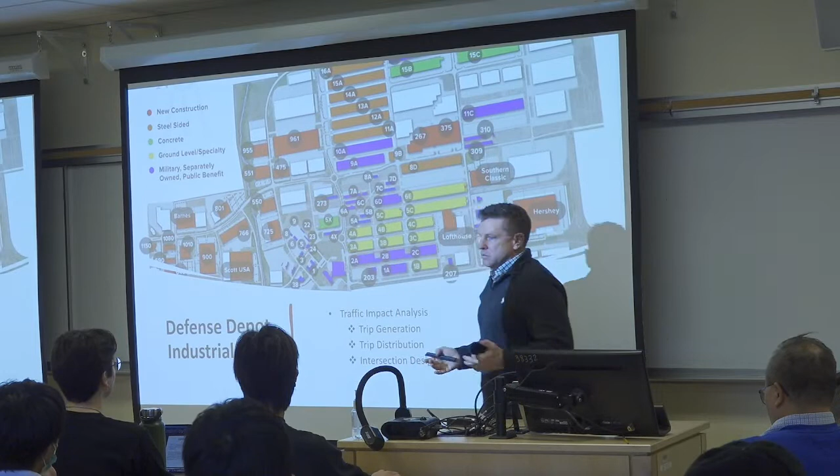I had just recently graduated from college. My professor was from England - Peter Martin - and he showed us pictures about roundabouts. He taught us about roundabouts, taught us about multi-lane roundabouts.

I thought, man, this is cool. So I just laid it out - I laid out the inscribed diameter. It was bigger than what was needed based on the volume of traffic, but in terms of safety and reducing conflict, this was a solution that worked. The city loved it, and once we designed the first one, they had me do three more for the other intersections.

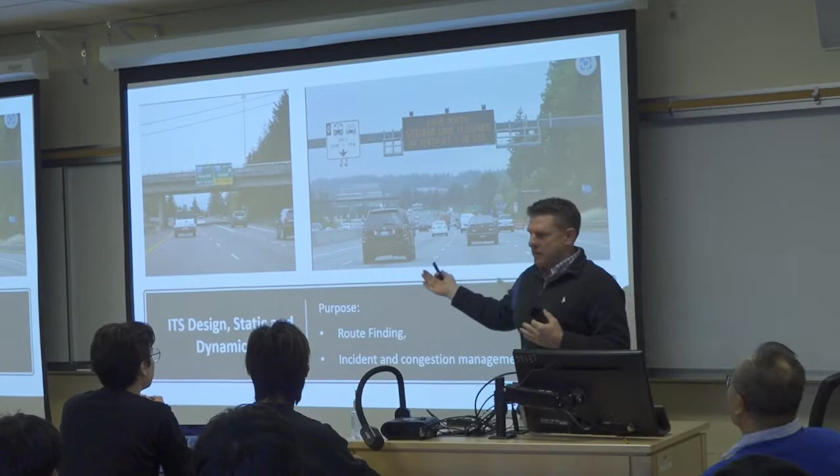The other thing I mentioned to you guys a little bit ago is with ITS, we were doing the VMS signs and then also signing. Did you ever think about, have you ever been told that a static sign was the first ITS device? Anybody ever heard that? I learned that from Peter Martin.

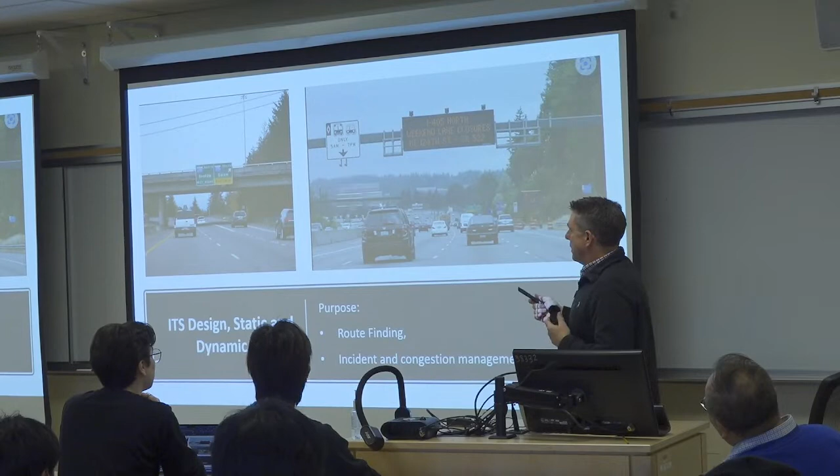So the first ITS design that was ever introduced, as they say in engineering, is as simple as a stop sign. It's information to the public that is using the system. And so that was part of my responsibility, was looking at our guide signs, looking at our roadway information, and how people are using it. You have to be mindful and aware of what is the message you're trying to communicate and how well it will be perceived.

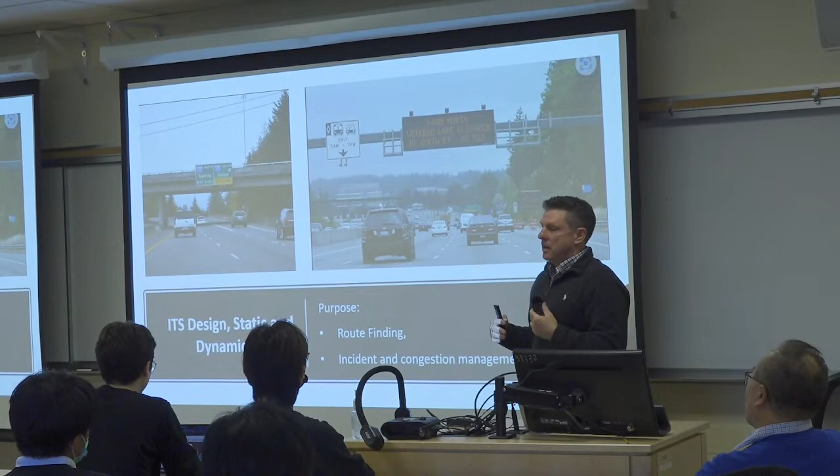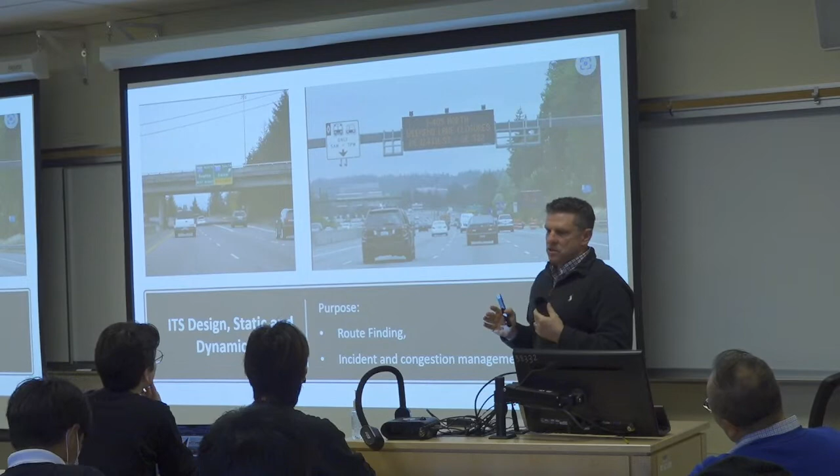There's all kinds of guidelines. If you haven't heard of it by now, many of you will come in contact with it, which is the MUTCD, the Manual on Uniform Traffic Control Devices. It's a handbook that every traffic engineer uses, and it provides design standards for those signs. Sometimes there are situations where the MUTCD doesn't work for every situation, and then you have to get creative and work it out.

The VMS sign, the VMS signs, they're a unique animal. Any idea on how much you think a VMS sign would cost to put in?

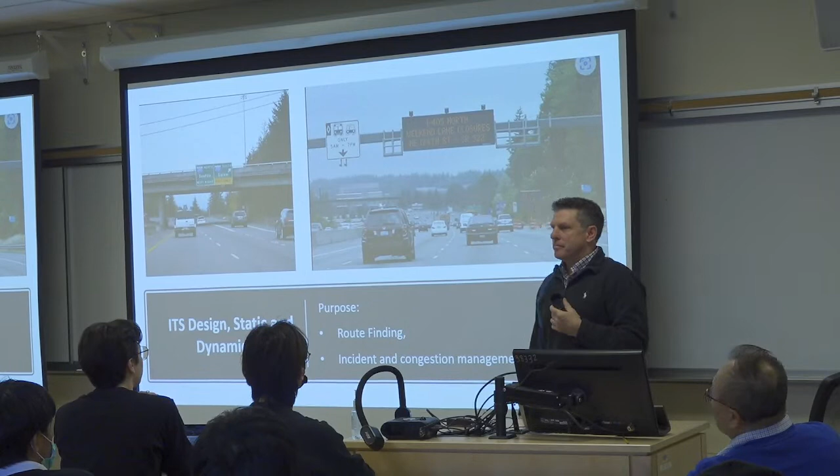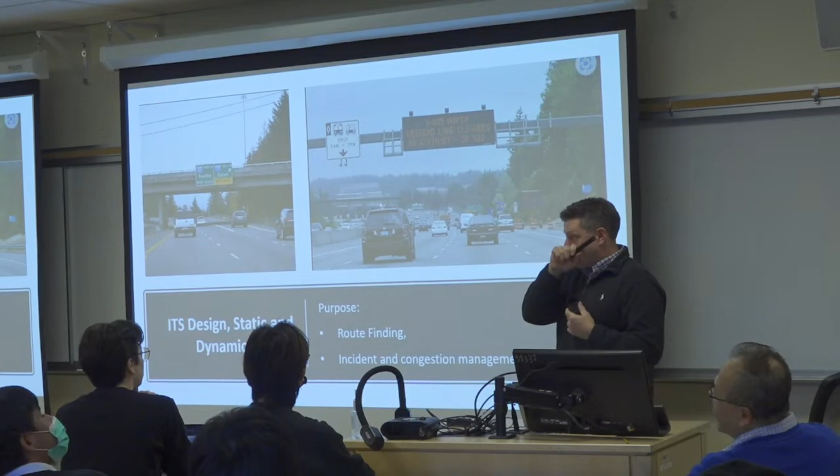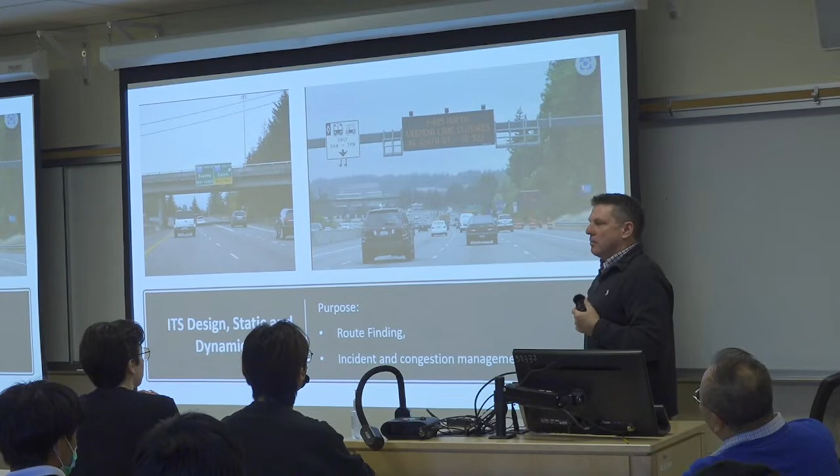And then when you get to the overhead gantry, you can spend anywhere from 500 on up. It just depends on how wide the road is that you're trying to cross, and then where your cabinet is for the controls. This is where, if you like to be creative, your world as an engineer gets to be fun, in my opinion.

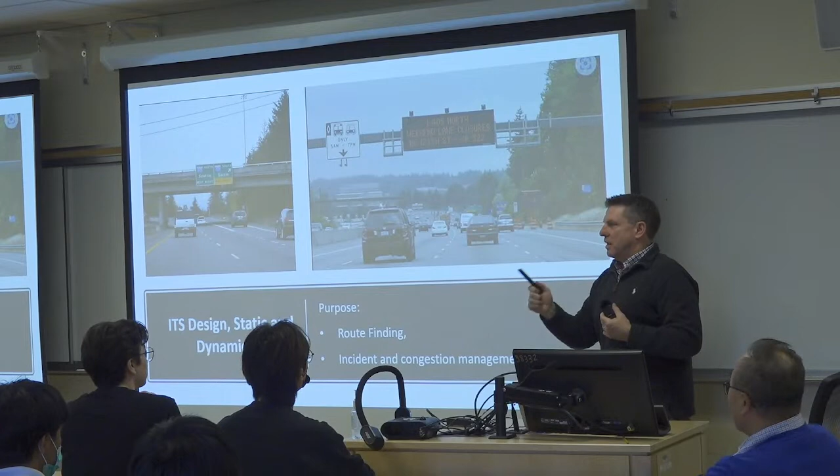Because when you're given the task of being able to come up with a way to communicate to the public, and you know you've got to come up with a solution to do it, and you get to pick the spot, and you get to design it, and you get to figure out how everything comes together. Where should you put the cabinet? What kind of a VMS board do you want?

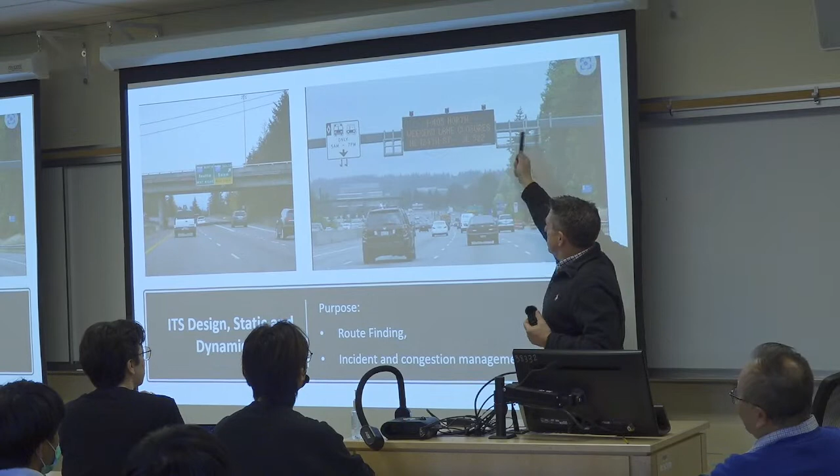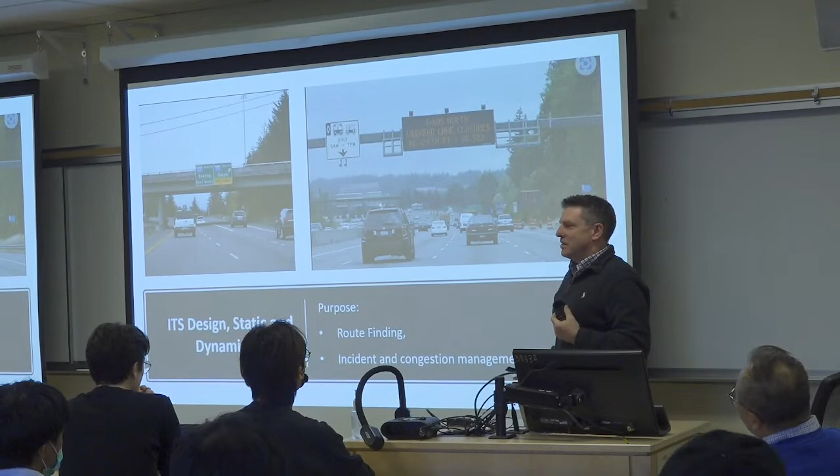These new VMS signs that they have now are different than when I first started. You can walk right inside of one of these things, and you can fix everything from within the cabinet. Those are all things you're thinking about - how to get maintenance in there. You're talking with the maintenance people as you're designing these things. So these are just kind of the facts as you're thinking about it.

How are you going to do this? How do you make all this stuff come together?

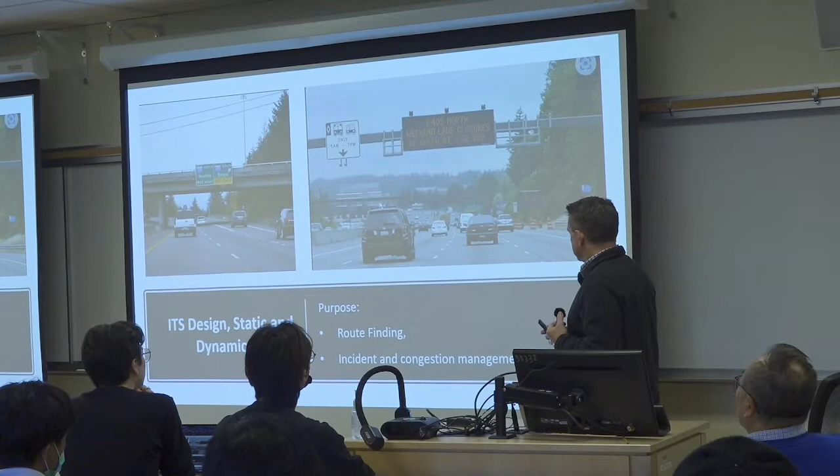The Tacoma Narrows. So I had the opportunity to work on this one first.

And what we had to do is - how do you guys think you get from the ground level up to the top? A big ladder? So as an engineer, would you guys all be willing to go up and do this? Go up to the top? Yeah? So my first experience is they have an elevator.

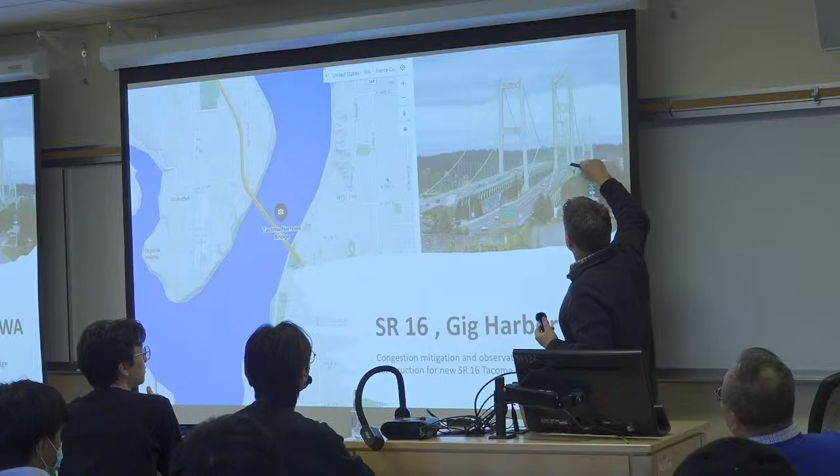And the elevator is in that side of the structure, shaped like an oversized water heater. It's round, and there was no light in it when I went, so the maintenance guy just handed me a flashlight. So I'm just holding the flashlight, standing in this round container, and you just feel every joint as you're going up, and you're just praying that it doesn't get stuck.

But anyways, we went to the top and we set up a camera at the very top of the tower so we could monitor the construction of the new bridge. It was a full PTZ camera at the time, the latest and greatest - 20 years ago, whenever that was, 2000 something.

And then we put another one over on this side, I think it was at Doc Weathers Park. That way they could monitor the construction of the bridge, and they could do a time lapse to show how things were coming together.

And then we had to design the communication cable that went all along the underside of that bridge. So we had to figure out how much fiber - and fiber is king in today's world. Back in the day when I first started, it was microwave or T1, or they called it a POTS line, plain old telephone. But now they've moved on to fiber.

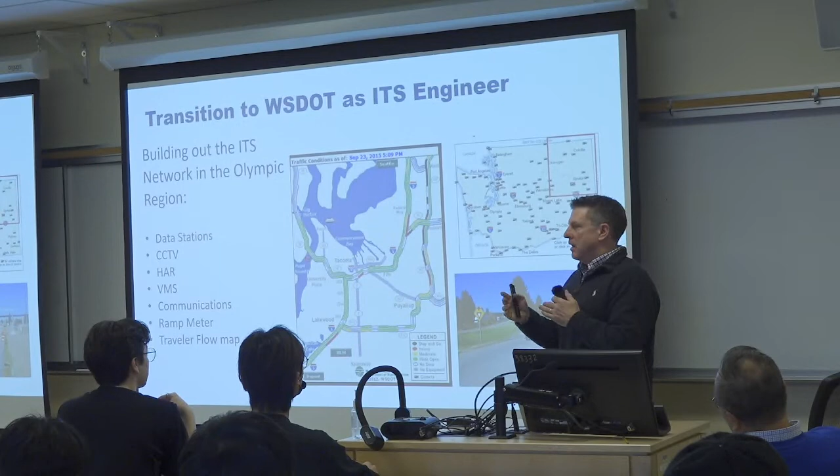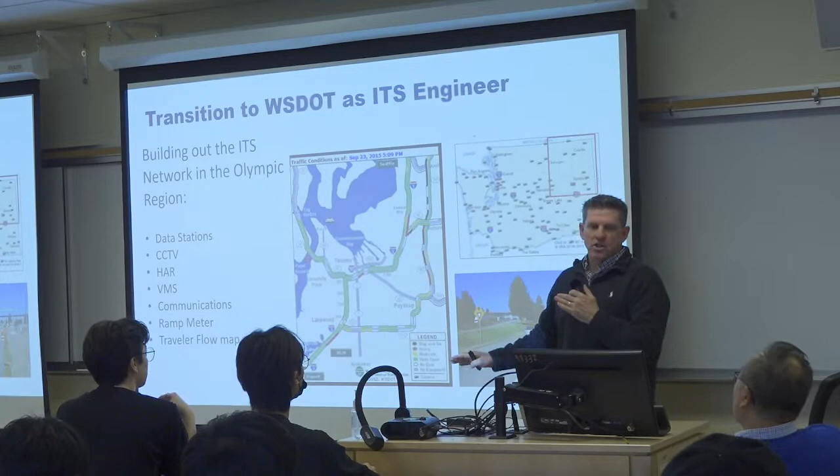During the earthquake of 2001, a lot of our communication infrastructure was built on private communication systems, the Verizons, the T-Mobiles, the AT&Ts. So what happened is during the earthquake, they prioritized emergency services over everyone else, and we lost control and communication of our system. So that's when we said, let's go back and revisit communications and figure out how to make ours more resilient.

We also looked at ramp meters, trying to put ramp meters on all of our on-ramps to help manage flow.

And then automated enforcement. I feel like I'm doing a lot of talking, you guys. Are there any questions? Anything? Is this really boring to you?

I may have a question. I'm curious about the data station you mentioned before. You said it can collect so many kinds of data, including vehicle classification, speed, density, occupancy. So I wonder how it can do that. What kind of sensors do you use for that?

So make sure when you talk about occupancy, we're not thinking about people occupancy. We're thinking about vehicle occupancy in the lane.

There's a number of different ways to measure this. The most reliable way is loops, right? You cut a metallic or electrical wire into the pavement, spaced a certain distance apart. You know that distance, so it calculates the time a vehicle takes to pass from one loop to the next. It can tell you how many vehicles pass that loop over a certain time, and how long it takes for a vehicle to pass over the loop. From those three things, you get your speed, your volume, your classification, and you can calculate the passenger cars per hour per lane.

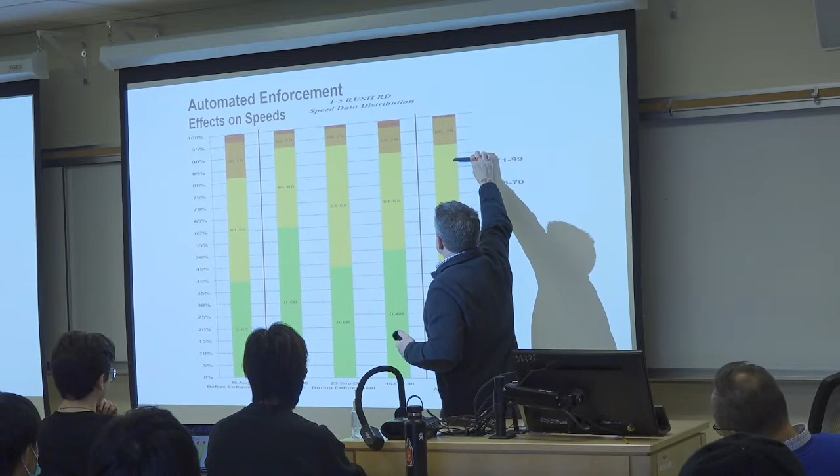So you see when it started, back in '08 - really shows I'm getting older, doesn't it? And then after enforcement, you can see where we reduced the frequency of how people were using that corridor. People became familiar with it, after they got caught they knew there was photo enforcement, but they didn't know where because we moved the van anywhere within the 8 miles. So they just knew they had to slow down through that 8-mile section. But it had an effect - it reduced the overall number of people driving between 71 to 99 miles an hour.

State Patrol maintains a log of the top 100 - it's not a good list. It's a list of drivers caught exceeding 100 miles an hour or more, and that list is regularly updated. We use that to help us understand as we're calculating things like the 85th percentile. There's areas of the state where the speed is greater than the posted speed, so we had to look at what we can do to bring those speeds down. Anyway, we used to - I don't do that anymore.

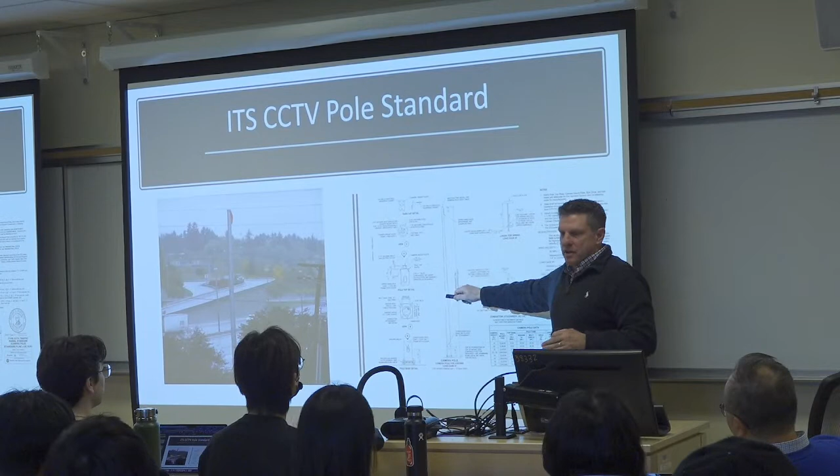So if we needed to put a camera on it, a radar detector, a speed limit sign, we tried to throw everything at it that we could think of, and then we designed it. The cost difference added maybe $1,000 or $2,000 onto the cost of the pole, and then this became the state standard. So now all the regions, this is what they use today.

And then you just throw in the other little devices, if you have an elbow that you mount onto a bridge, just working through some of those details.

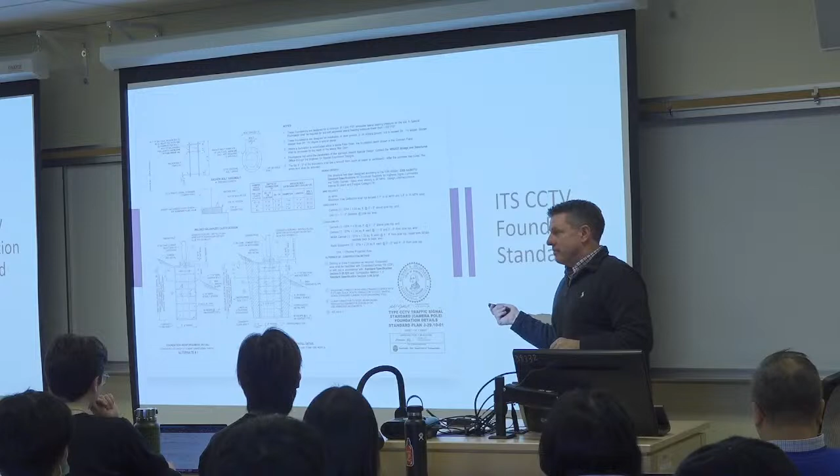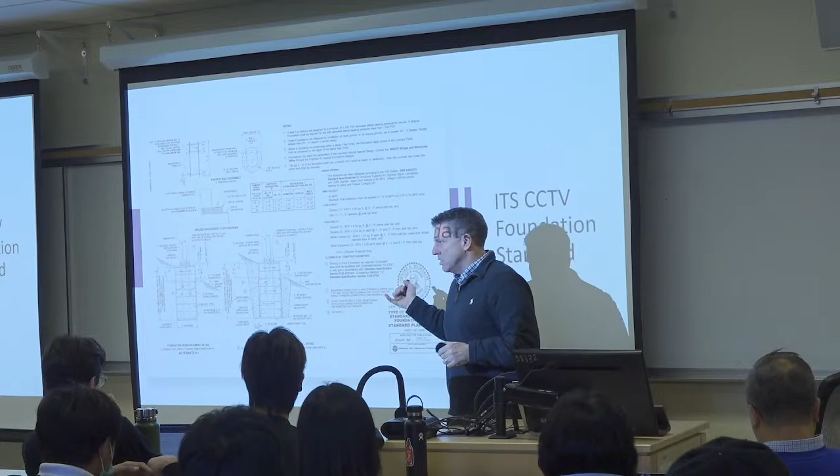And then the partner to that is the foundation. I noticed looking at all the foundation plans that the difference in the depth of the foundation was typically about 1 foot, but the cost to do the soil analysis, the geotech investigation, was about $6,000 a site. So a yard or two of concrete is what, $100? So what we did is assume a minimum bearing pressure for the soil, and we said this is our new standard for our foundation.

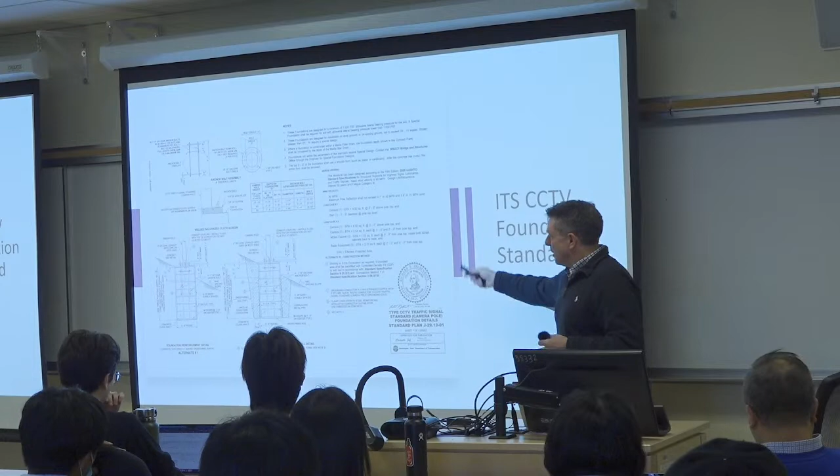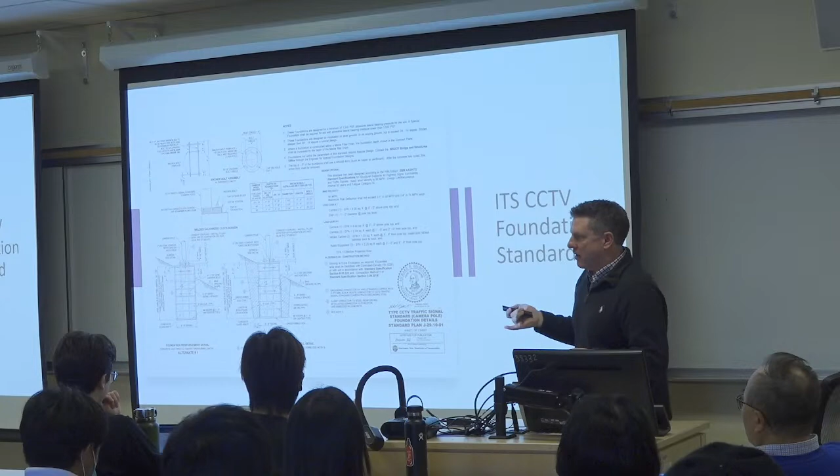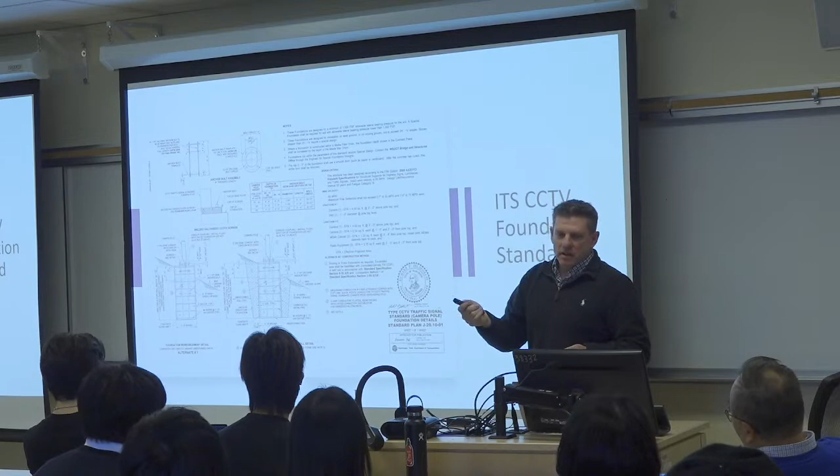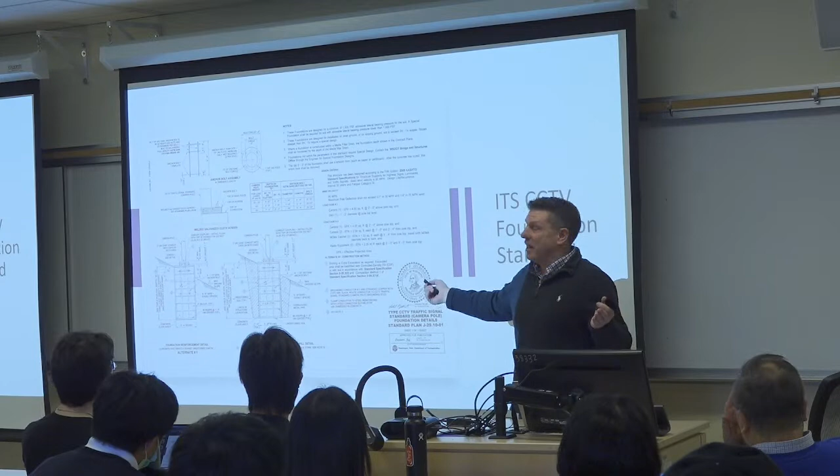And there's always people out there to help you do this. If you take your idea and share it with the right people... I didn't do this design. I took this to our structural engineer, and I just shared with him what I was thinking.

He liked the idea, and so we came up with this plan. I think it's with those resources and relationships, that's how you do it. That's the most important piece I can pass along to you: engineering is about relationships, whether you realize it or not. The success of your project will often depend on your relationships.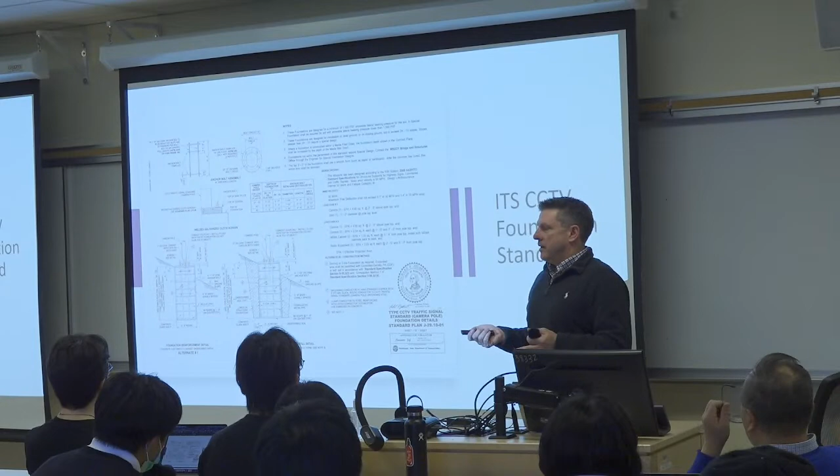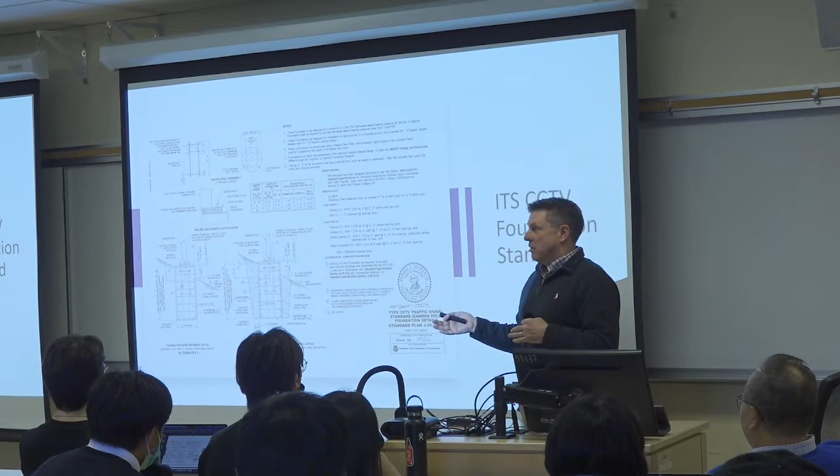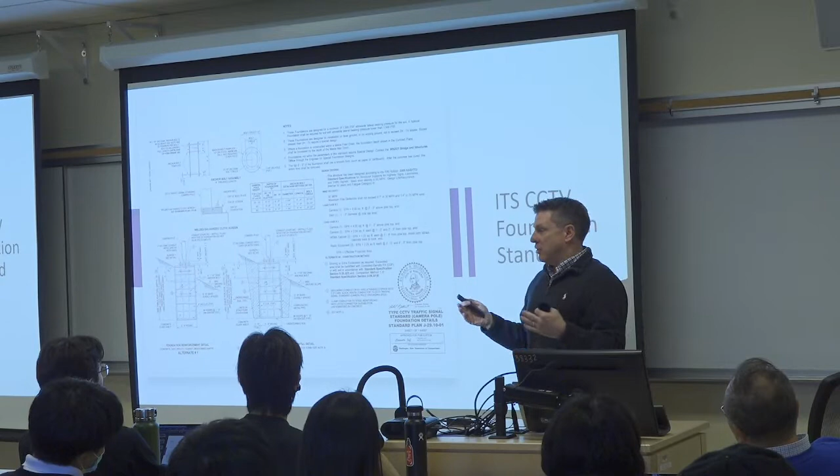When I first started consulting, my boss asked me if I knew what PE stood for. Of course I did, right? Professional engineer. And he said no, it's about politics. It's political engineering. I didn't understand that at the time, but I do today. It's important for you to maintain and develop relationships with your peers and with people that have different expertise than you. You don't have everything you need to solve every problem, but you can find people that do, and those people can help you develop a solid project.

Are we out of time? Yeah, if you want to take a 5 to 10 minute break, you could. It's all under your control. Do you guys need me to take a break? Are you done with me? Or you can continue. Okay, we need more time, we can maybe continue. Feel free to use the restroom. Do you guys need a break? Take a break.

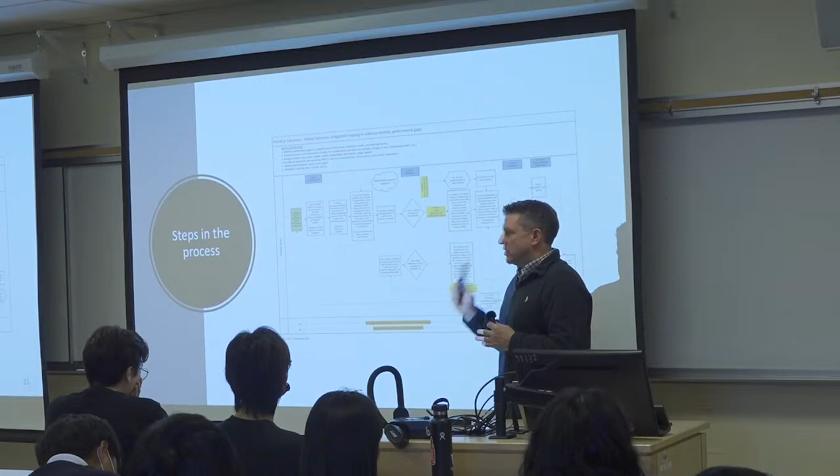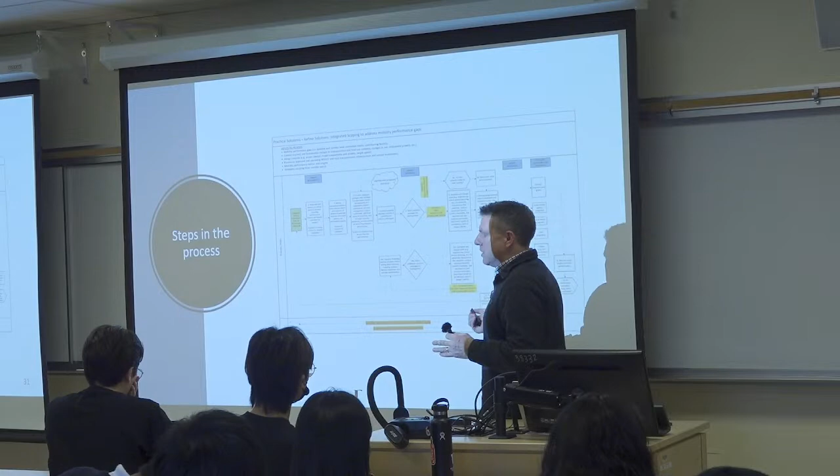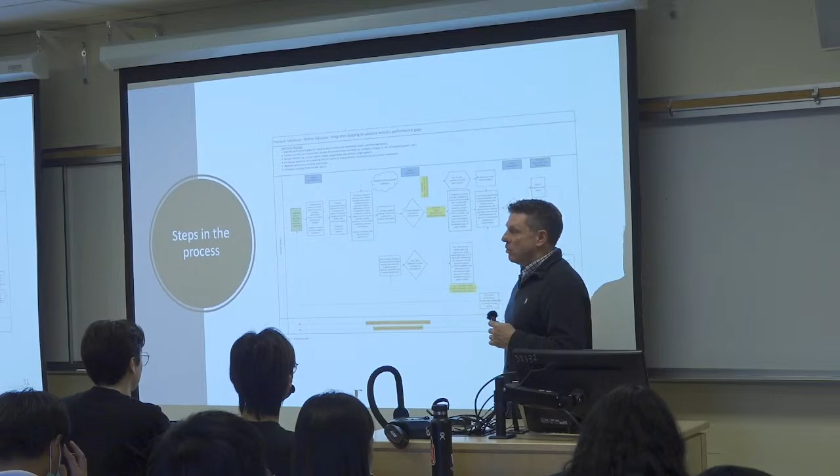Engineers love their processes. What we were doing here, we were trying to figure out a way, because there are so many needs - if you're working for a state or city government, you're always trying to figure out how to pay for the needs that you have. And how do you identify those needs? So we worked with a team and came up with a process called the integrated scoping process. The overall reason for this was to identify what are the needs, how do we fund them, and how do we deliver them, and who is responsible for delivering them. So you get to use your skills as an engineer to develop these types of processes to help people understand how decisions are made. And I think that's where the thinking comes in - with the skills you're learning in school, it helps you develop stuff like this.

What incremental improvements, what are some improvements we could do in 0 to 4 years. This was done by pulling together focus groups. There were 10 focus groups where we pulled in people from law enforcement, planning, engineering, local agencies, and we wanted to hear every idea they had for reducing congestion on I-5. My scope of work was from Trosper Way, down by L&I on I-5, up to the King County line, and our job was to figure out what we can do to reduce congestion.

Overall there were a couple hundred ideas that came out of this group. Sometimes engineers have a reputation for thinking we're always right. Usually we are, but the public doesn't like that. The public likes to be brought along, they like to know that what they're bringing to the table is being heard. I think it's important for us to acknowledge that and make sure we're not forcing a solution on them, that we're bringing them along and making them part of the solution. That's how we got to these strategies.

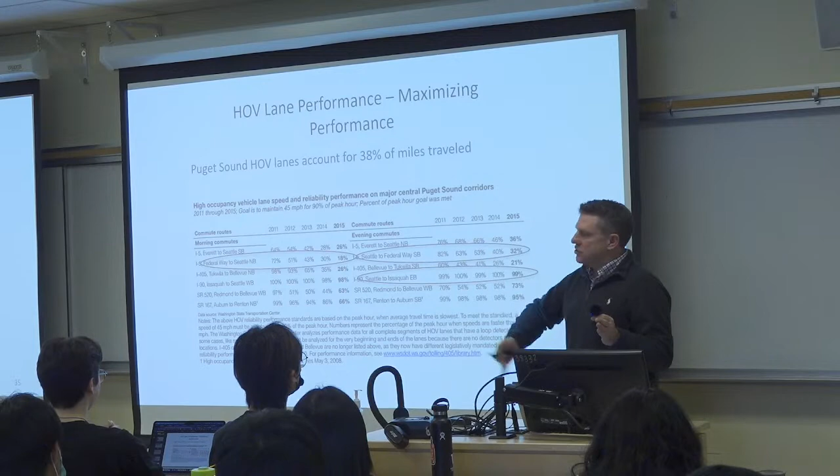Every year for the last 5 or so years, the commercial carrier group was hiring a lobbyist to try to get that law changed, and we would always have to provide testimony and justification on why we don't think it's a safe strategy.

HOV lanes, reliability and benefits, monitoring the results from HOV lanes. We want to make sure that if people are jumping in the HOV lane and paying money for it, it's actually helping them get where they want to go faster than if they're sitting in regular traffic. So monitoring, I would work with UW students, and we would look at the data and provide this annual report. We'd work with the Seattle division, and then we would put this together so we could share what it looked like.

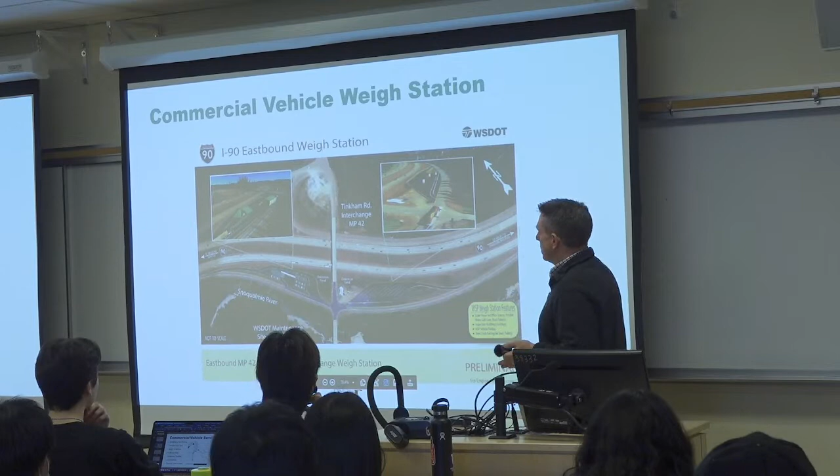I'm trying to jump through this, you guys. This is just an example of a location where we were looking at putting a weigh station facility, and kind of what the configuration looks like and some of the detail that goes into that.

So, like the weigh stations—is their primary service basically ensuring trucks are operating at load capacity? It has nothing to do with importing goods or anything like that? Is that data used for anything else, or just for the service?

So the way it works is if a truck driver wants to, he or she can get a transponder from us. The transponder becomes an electronic fingerprint of that truck—it records what the cargo is, who the driver is, and reports all the information we need for that load. If a driver comes to our weigh station, we have an overhead detector that picks up that transponder and downloads it into our federal database. If that trucker is good to go, he or she gets a green light and can pass. If not, they automatically have to come in. If they come in, we weigh them and inspect their vehicle, and they're going to charge you too. If they're overweight, we take them out of service, and we either make them divide their load or come up with another option. But we're not going to let them back out on the roadway.

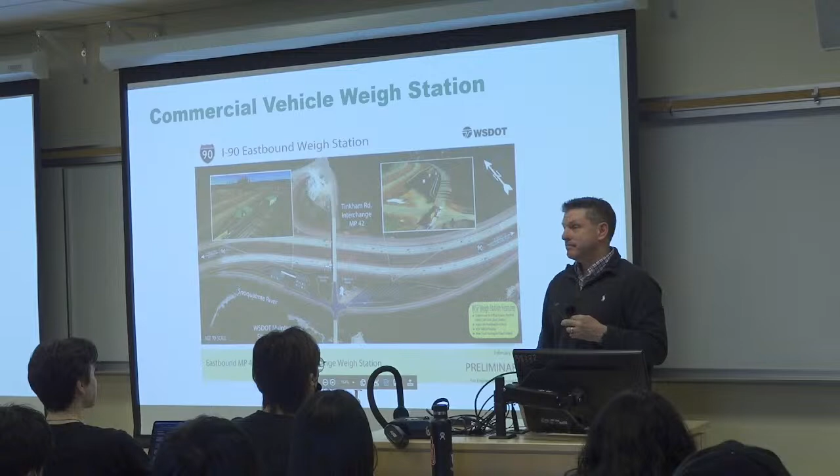So this is an example of a weigh station, right? This is also like a State Patrol detachment facility. So you've got State Patrol who's positioned in here, and often there's a scale pit, maybe on the other side of that wall, and then there may be an inspection pit back behind the building where they can pull their trucks in and do their inspection.

A facility like this, we spend about $16 to $20 million on to build it. Interesting thing, you guys, I think 2 years ago, Ridgefield Weigh Station, a fairly new facility - in front of the building we put concrete barriers, right? And the barriers taper from like 6 inches up to like 3 feet.

This Cadillac came into the work zone doing about 100 plus and hit that barrier, clipped the top of the roof, and then came back down. Craziest thing I'd ever seen. It was actually a suicide attempt.

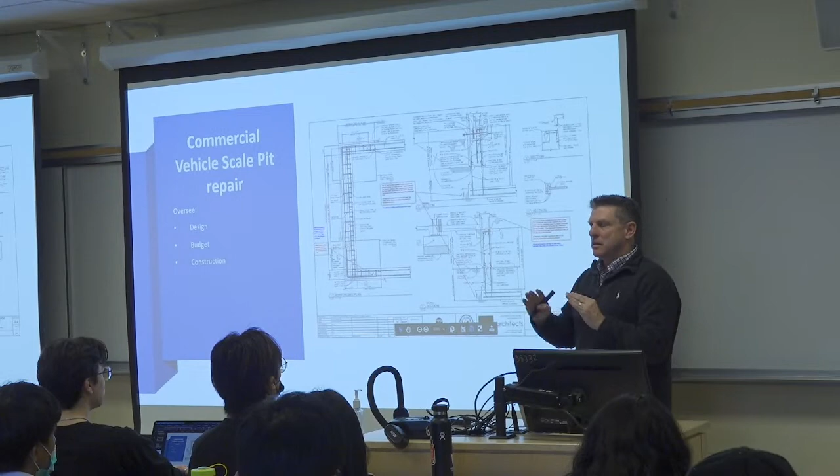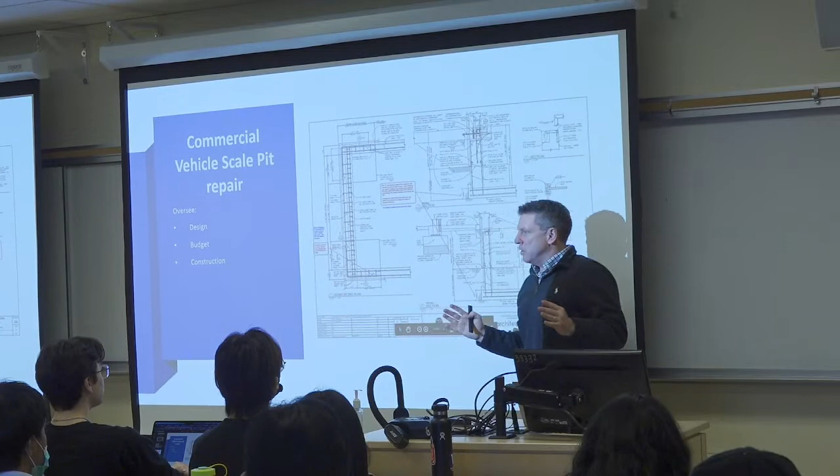Then I just wanted to understand. The local engineers were saying, well, let's just rebuild it. And I'm like, time out, man, let's understand why is it failing. So then we started looking at the rebar, looking at the concrete. And I'm like, how is it that we can build a bridge abutment that can last for 50 years, but we can't build a scale pit to last for 20?

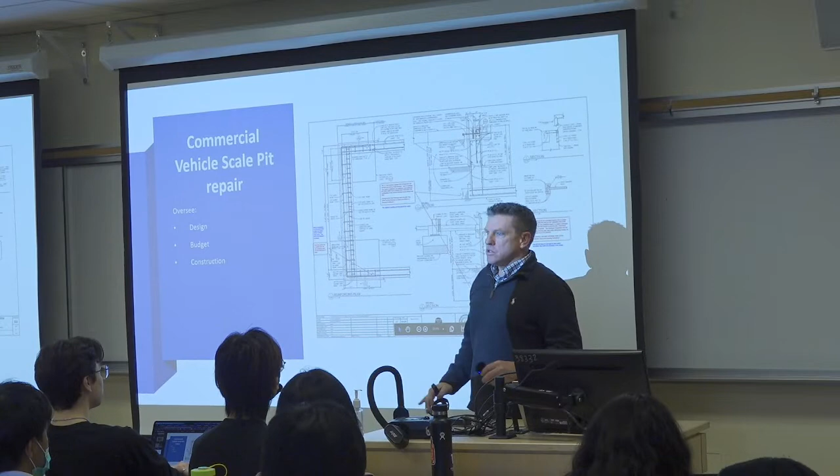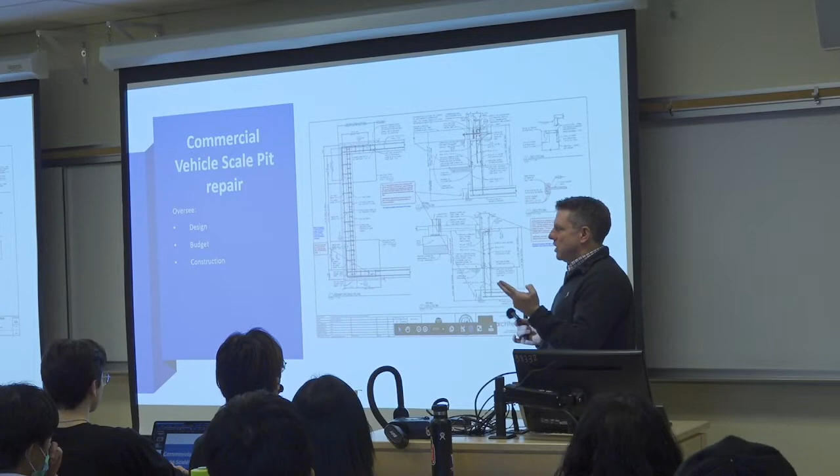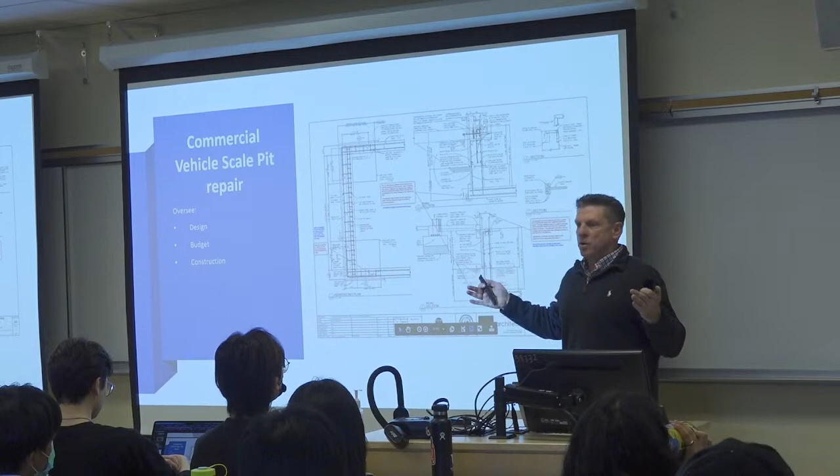So we started looking at this, and we realized there were things we could do similar, so I reached out to the bridge engineers - I'm like, what can we do here? These comments are from our bridge engineers, and they said what we can do is change the concrete design, change the rebar and make it all epoxy coated, and change our steel to make it all stainless steel - any connection will be stainless steel. So we changed it for about 10% more, but we'll get another 15 years additional life out of it - instead of 5, we're going to get 20. To me, that's a pretty good investment.

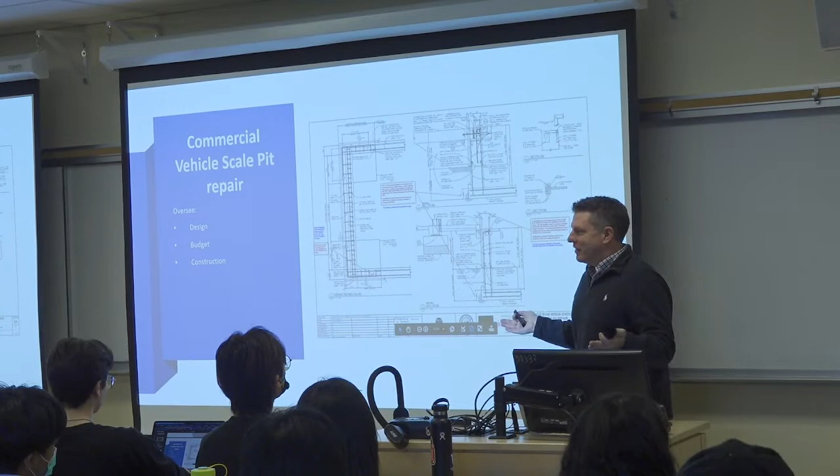So I think the question for you as engineers is, don't be afraid to ask why. How often are trucks supposed to get weighed?

It depends on the transponder. If a driver has a transponder, they should be weighed before they leave with their load, right? Because every state is different, so if you're a carrier crossing state lines, you have to obey the laws of that state. If you have a Washington DOT transponder and you're coming into our state from Oregon, you'll probably have to be weighed coming in across the border. But once you've done that, you're free to pass all the way to Canada, if you're good.

All right, the other part is commercial carriers. With our commercial carriers, if we have an oversized load, we are processing the permits, verifying the route that they are going on, and making sure that whatever it is they're carrying, that they can make the turn, that they can make the height, and that they've got the right pilot car and pilot car certification.

As an example, over the next I think 2 years, Washington State, they're going to be bringing in 100 windmills from the south up to the east side, and all of those had to be permitted. It's going to happen late at night, when traffic is at the lowest, and it's going to happen over time, not all at once.

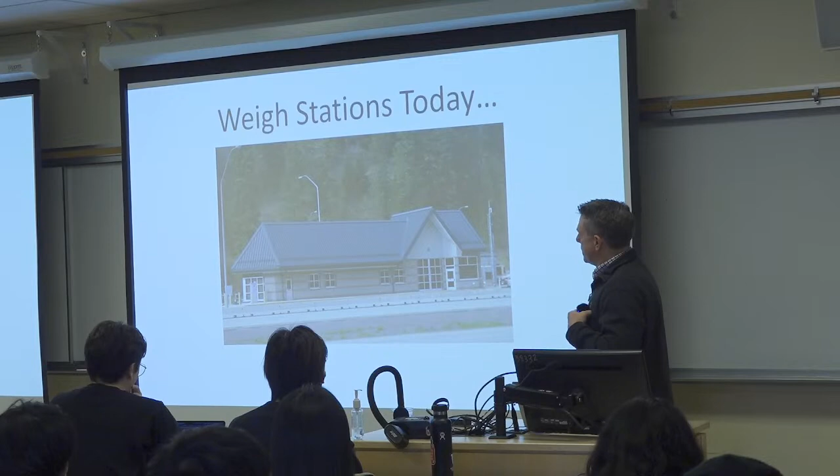So this is an example of a weigh station today. I told you about the cost - this is what we're trying to get to. This is what they call weigh-in-motion, and it has all of the technology that building has. It can measure the weight, check the ID of the driver, screen the transponder, and send it along to your computer if you have the IP address to connect to it. If a driver is operating at an illegal weight, the officer could see it and radio to go after that driver. The difference is this costs about $350,000 to build instead of $16 to 20 million. This is where we'd like to get because we can do more enforcement in more places.

How is it weighing - is there still a scale under the ground? Yeah, so there's bars in the ground, calibrated, and you'll see these long lines - the pavement has to be very smooth. You can't have ruts in it. It's got to be pretty level, and it's typically concrete. So not every site we do that, but that's the direction we're headed.

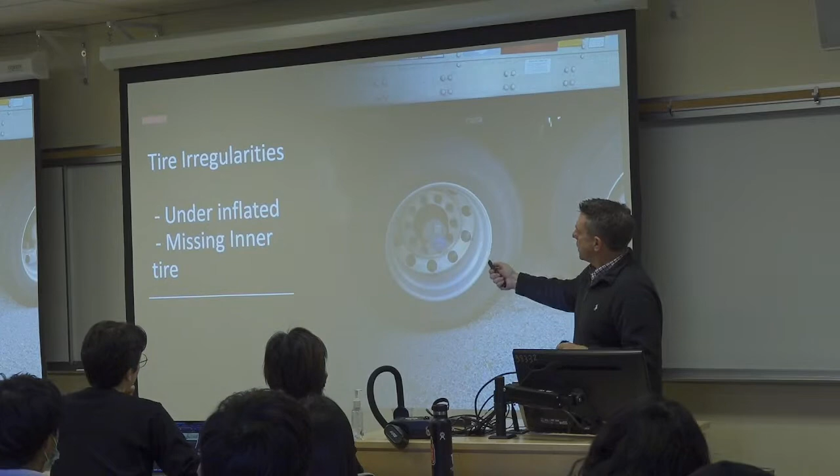The tire anomaly system was something new we were looking at just before I left. This allows us to monitor the individual tires of a truck. It will tell us if a tire is flat or underinflated, and we can bring that truck in for a more visual inspection. It will tell you which tire it is - it highlights it so you can bring the truck in and go right over to do the inspection.

The other thing we're doing for our truck parking pilot - what we tried didn't work as well as we thought it would. This was a wireless detector, about 3.5 inches square and 2 inches high. We core a hole in the pavement, drop it in, fill it full of epoxy, and it's wireless - it detects a magnetic surface.

They make all kinds of claims. Remember the test site I talked about? These guys claimed a battery could last 10 years - I think we got 3, if we're lucky less than that. It's great near term, but even still the accuracy and reliability isn't that great. It's just a 4-inch diameter hole - we drop it in and cover it with epoxy.

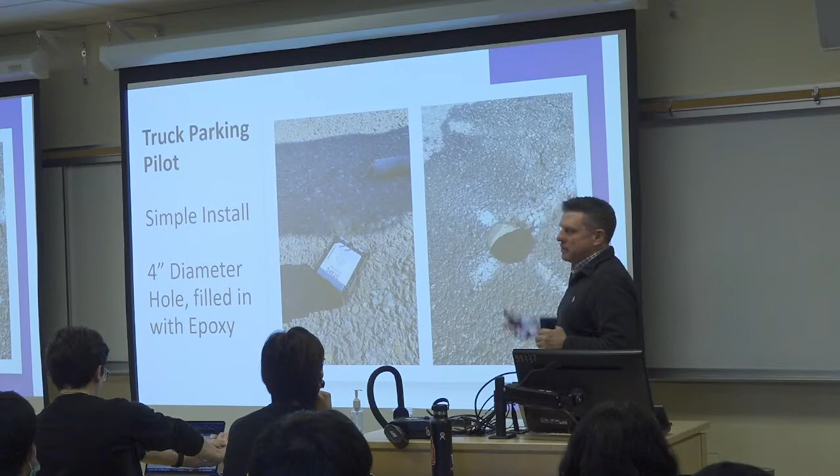This is where I am today - I'm in Park City, and these were some of the problems I was handed when I started there.

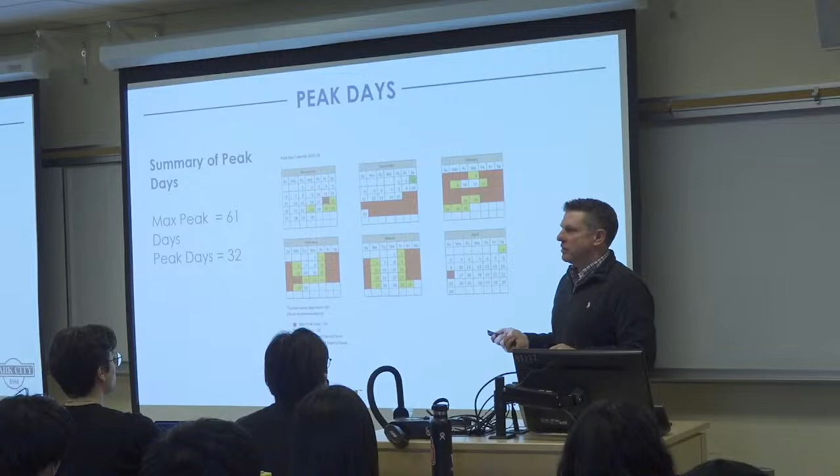Emergency access to resorts, public safety in neighborhoods, impacts on resident quality of life, traffic, transit stuck in traffic. What we did is say, I want to understand the days when all this is happening - what are the worst days of the year? So we pulled the data together. The days in red are the worst days - when the resorts are open and we typically have great snow, with a max peak of 61. The yellow are just peak days - heavy, but not as bad as red. As an example, at peak it could take 45 minutes to an hour to move 2 to 3 miles. You could walk most places faster than you could drive in Park City.

Areas of focus: circulation, transit, parking, guest decision-making, resident impacts. We put together a comprehensive plan and took it to city council - five members plus the mayor - and said, here's how we propose to solve the problem. We identified a circulation plan around the base resort, recommended a park and ride lot, wanted to increase transit frequency from 30 to 20 minutes, and raise parking prices to push people to the outside of the city. If they don't want to pay for parking, we offer a free option with free transit.

Remember how I talked about engagement? We brought these people to the party and met with them weekly or monthly, depending on who they were. Utah DOT wasn't weekly, but everybody else on that list we pretty much met with weekly. We brought them into a room and talked about what was working, what's not working, and what their ideas were.

The tiebreaker for me - Park City came up with a strategy, the resorts came up with a strategy. I said let's hand them both over to a consultant, a neutral party, and see what they come up with. The consultant said, we like some of these strategies and some of these, so we'll put them together. And you know what - it reduced congestion significantly this year. It was the most positive response the city council has heard in years.

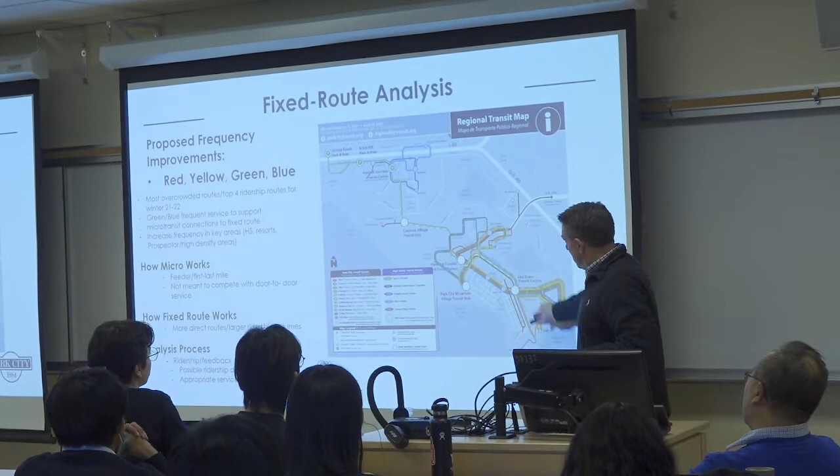This is just a transportation network. These routes - we looked at ridership, wanted to know how many people were using these systems, what time of day, and used it to identify how long they should run, what frequency, and where they should go - where are the densities in the community that are underserved? We found that on this gold route we were spending $250,000 a year to pick up 8 people a day. So we said forget the bus, we'll put a minivan there on demand, and that minivan can pick up those 8 people every day. Instead of spending $250,000, we'll spend $50,000.

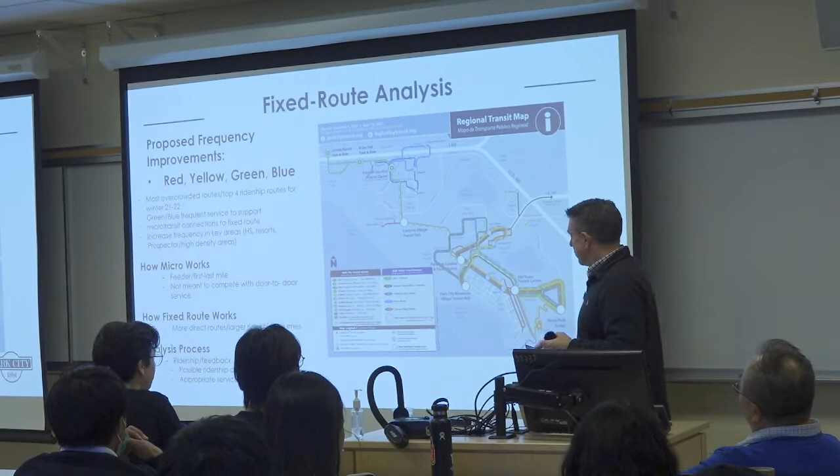These are the routes we increased. These routes were 30-minute routes, and the community was saying they're tired of waiting for buses and want more reliable service. So we said, okay, 20-minute service. We went to the council and said we can do this for an extra $500,000. They said, great.

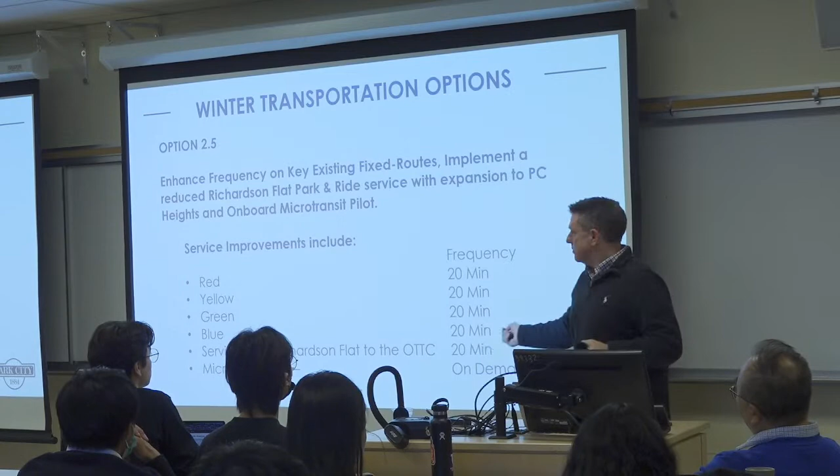Then resort parking. The neighborhoods were irritated that people were parking on their streets, and they were worried because skiers were parking in the business parking lots. So what we did is change the duration of the parking, saying you can only park here for 2 hours. We also changed some places, like the parking garages, to $30 a day, since the resorts were charging $25 a day, so we made ours a little higher. And if you don't want to park at either place, you can park for free at a park and ride lot and we'll bus you in.

Deer Valley, I'll go through this real quick since I know our time is up. Deer Valley is a beautiful place. It's great to look out my window and see this place.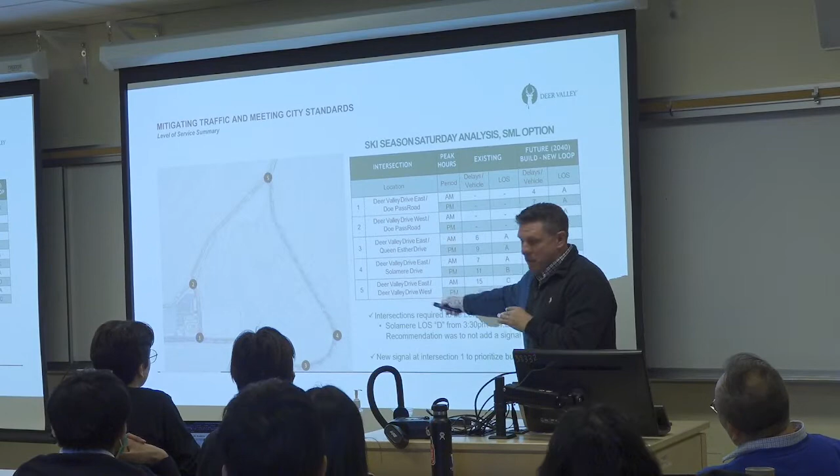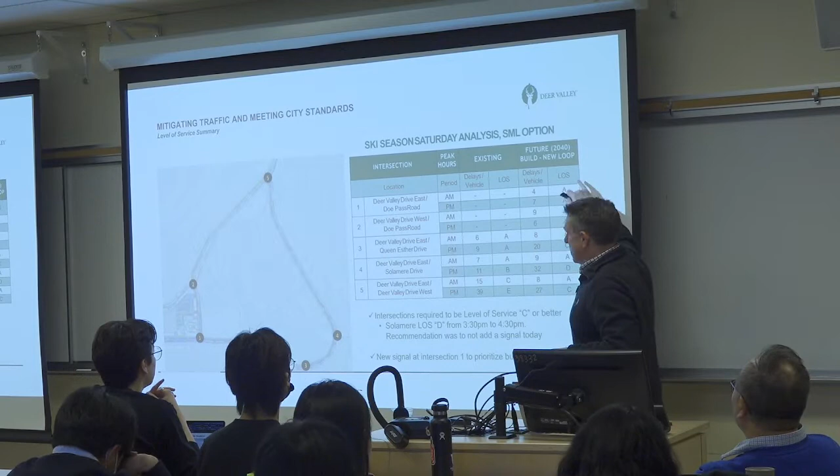And then they're doing a base expansion. As an engineer, my responsibility is to look at the analysis and just see if everything makes sense - the level of service, does it make sense on what they're proposing. I want to understand what their assumptions are.

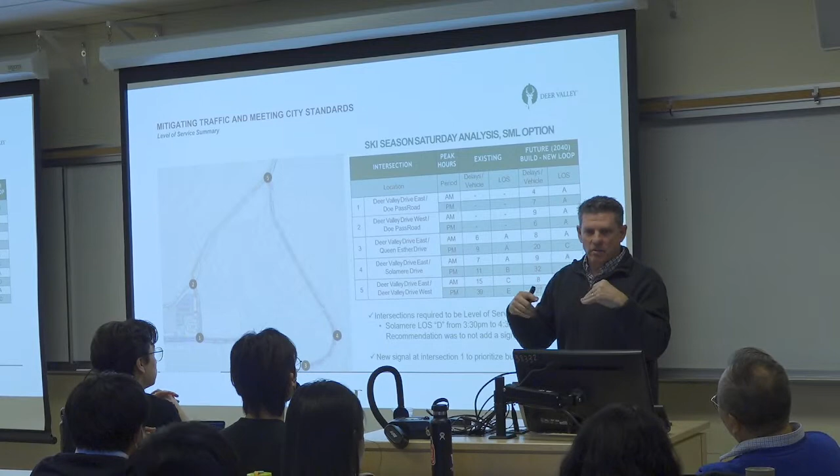The things you're learning in this class, I think, follow this really well. The things I learned in this class are things I think about all the time. When I'm in meetings, when I'm talking to people, those concepts are how I break things down and how I approach a problem.

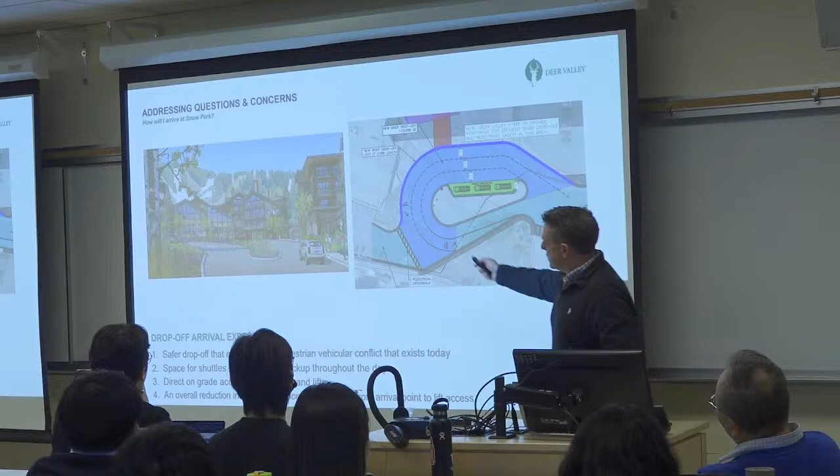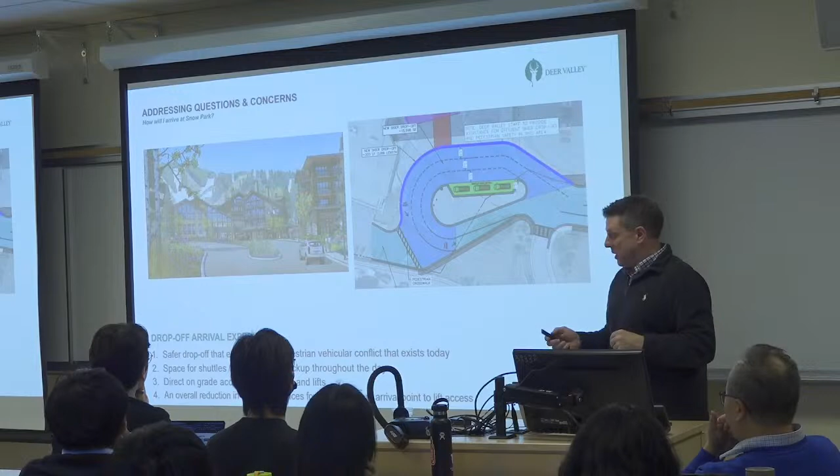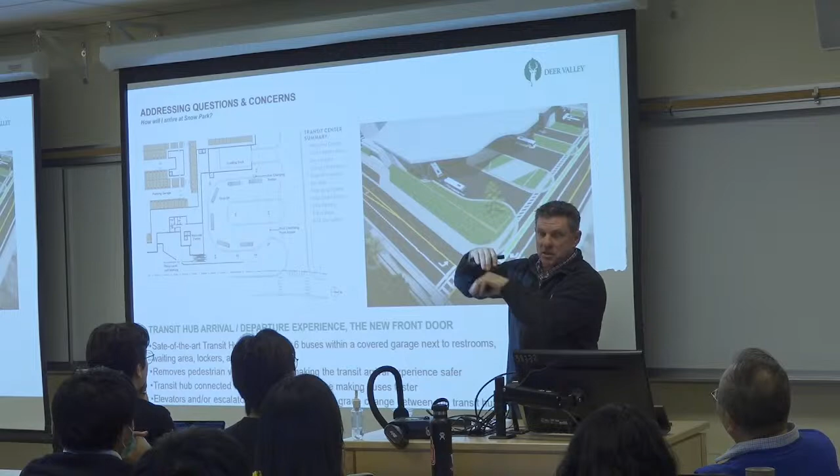And then this is the bus drop-off. They're going to add about 250 condos, so think about that in terms of demand and what that's going to put on an existing system that's already at capacity. This is going to have a charging station with an overhead, so our buses just come in and it connects to the bus and charges them. It will give them an extra couple hours of runtime with about 15 minutes of charge time. The resort's paying for that.

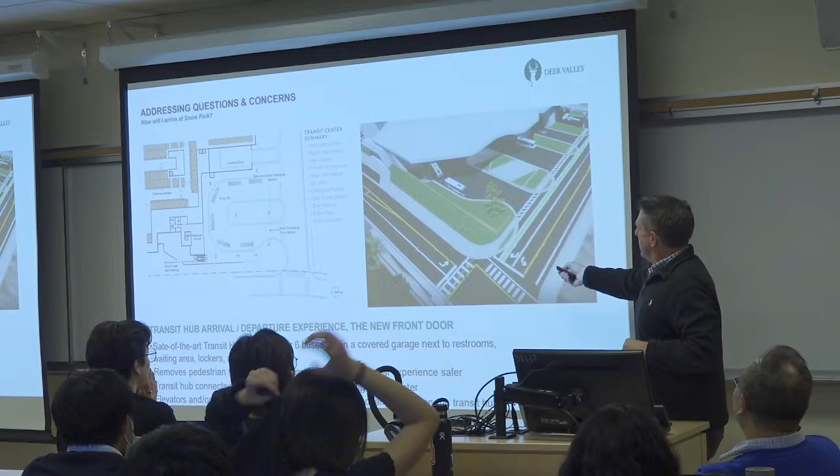So I think that's the end of my presentation. To summarize, you can see there's a lot you can do with a degree in engineering and transportation. I think it's important to be mindful that sometimes we don't always get to do everything we want to do in your career.

Like I said, when I was in consulting, it wasn't always traffic. Sometimes I would do utility design, sometimes a parking lot design. But I always looked at it as a new opportunity to learn and gain experience. I didn't ever think I would be where I'm at today. These experiences just kind of helped round off my tool belt as an engineer, and I really love being part of stuff like this and having an influence in how things are growing.

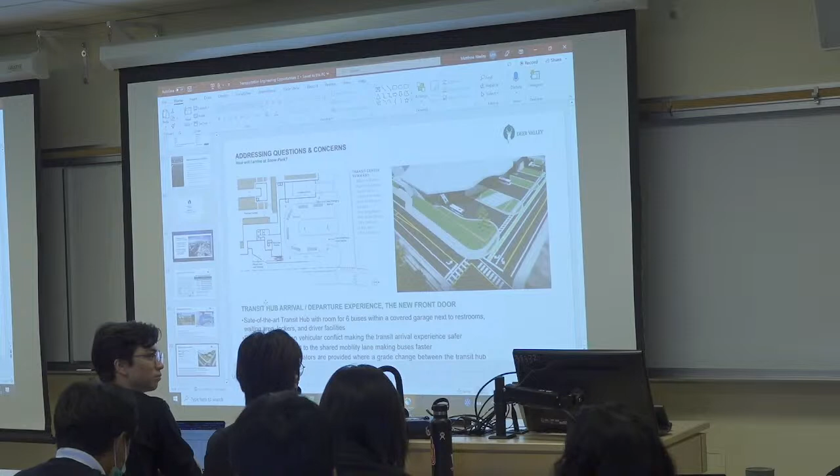Maybe while you think about this, I can start a question, Matt. So I know there's a lot of very good ski fields. You're using electric buses, but electric bus battery performance will be poor when the temperature is low. So how did your city address this challenge?

So it's a great question. A handful of years ago, the city said that they wanted to be all electric by 2030. And your point is spot on - we have a hard time charging too in the wintertime because the overhead chargers get covered with snow. So what we're proposing is that we don't go 100% electric, that we still maintain a 20 to 30% diesel fleet. That way, if we need to bring a truck, we can bring a bus in to charge it and substitute it with a diesel. The technology is just not there yet. It's catching up - it's better than it was 5 years ago.

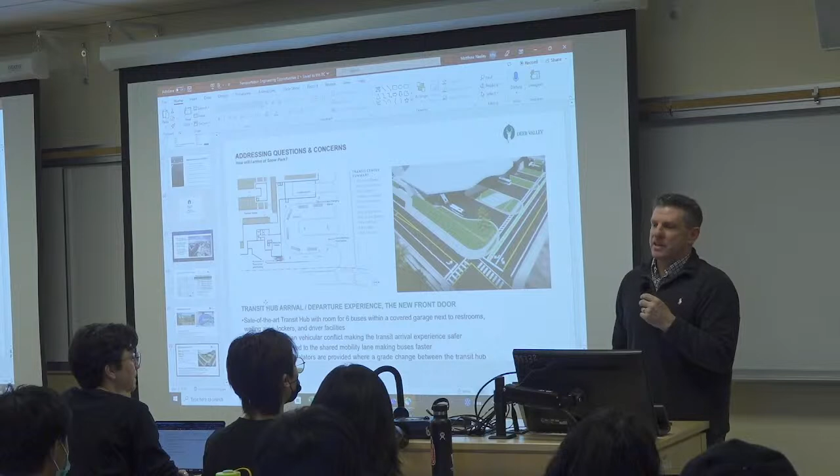And I think it's either going to have to come to a point where we prioritize transit, like we're trying to do in Park City, where people on a bus can wave as they go past a car stuck in congestion, until maybe people will say, you know what, maybe I should park at the park and ride instead of sitting in a car. I think as some cities are getting there based on their congestion issues, it will just put pressure to get there.

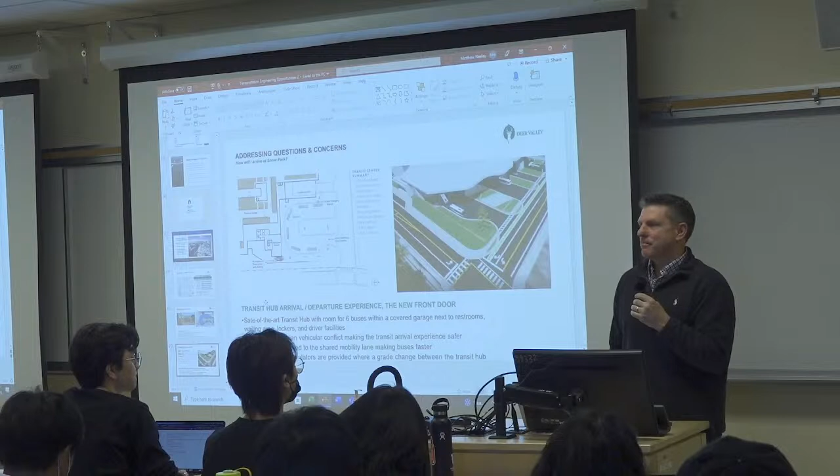How did you manage to make all those services free, from the bus to all of that, without having to charge the customers? Was it like an allotted amount from your budget or something?

Yeah, so our revenue comes from FTA funds and also from the resorts. We get a lot of sales tax revenue. During COVID, when everything was shut down, Park City wasn't, because Park City was an outdoor recreation place. So Park City saw some of their highest numbers during COVID because people could play outside. The problem was our buses weren't full because people wouldn't ride the bus, but we were still getting revenue. So we weren't running as many bus routes during COVID. Now what happened is we still have kind of a surplus from that, which we're now using to help us with some of these routes. But that's where it comes from. Our bus fleet, 80% of our bus fleet is funded from FTA funds.

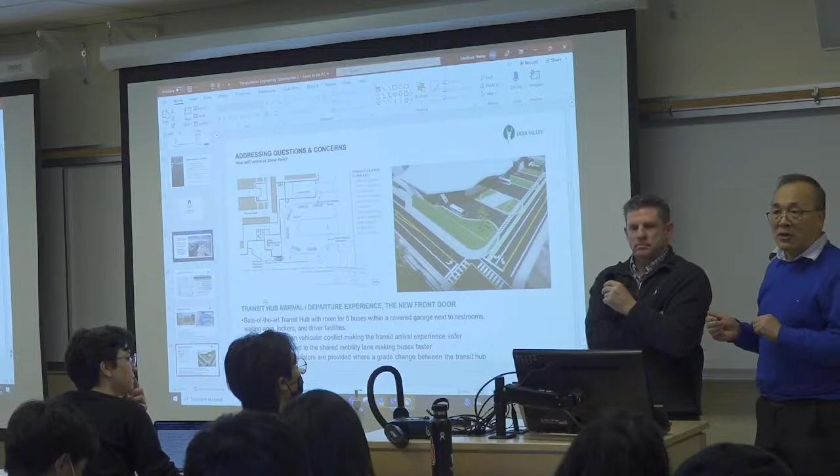Thank you. Thanks, man. I will treat him to a good dinner today, just to appreciate my friend.